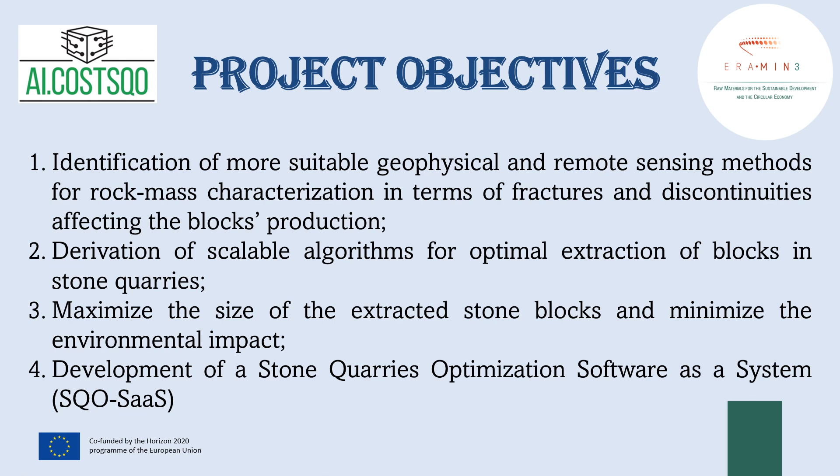Maximize the size of the extracted stone blocks and minimize the environmental impact. And development of a stone quarries optimization software as a service, SQO SaaS. The main expected outcomes by the end of the project are the following: a framework for quarry optimization and environmental sustainability based on artificial intelligence algorithms.

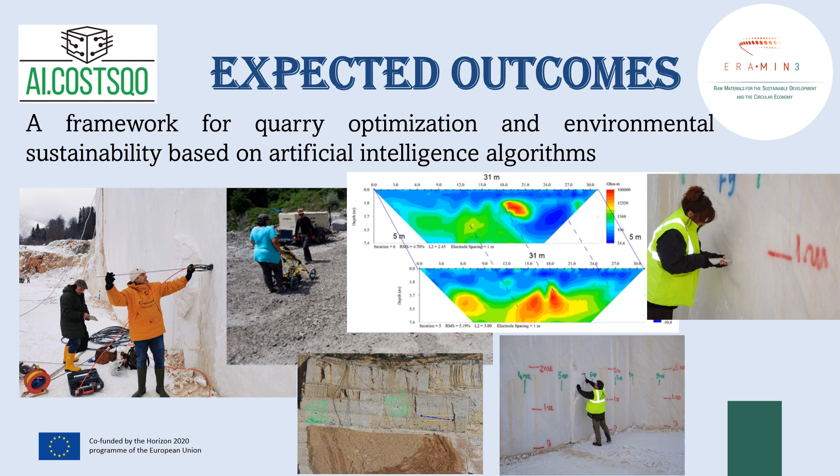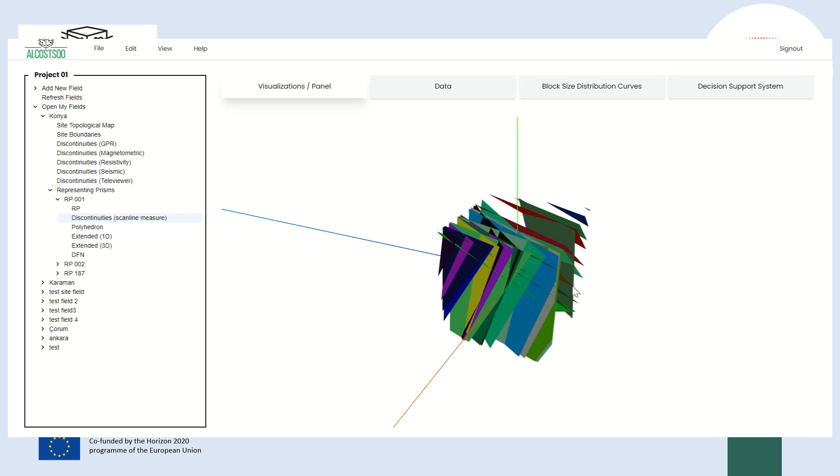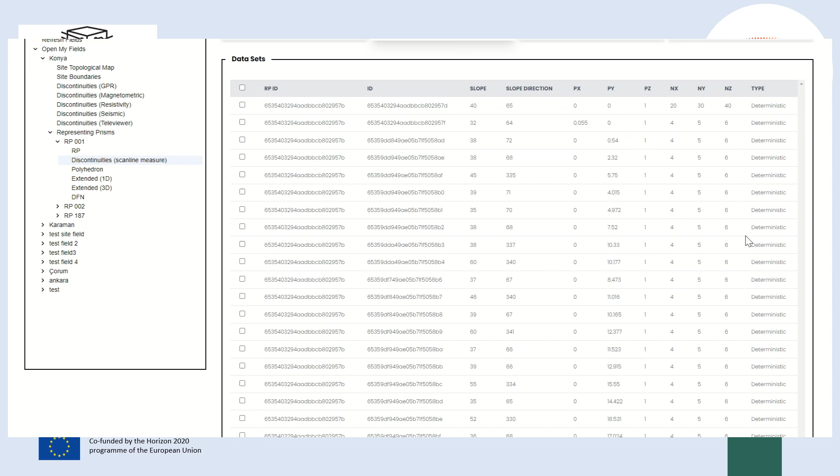And then we can see the representative prism. This is only one rectangle, and for example, discontinuities inserted from the scanline measure. This is the deterministic approach of the problem. We have envisaged to develop both deterministic and stochastic analysis of the fracture system. In this case, data is represented deterministically, and we can visualize this data.

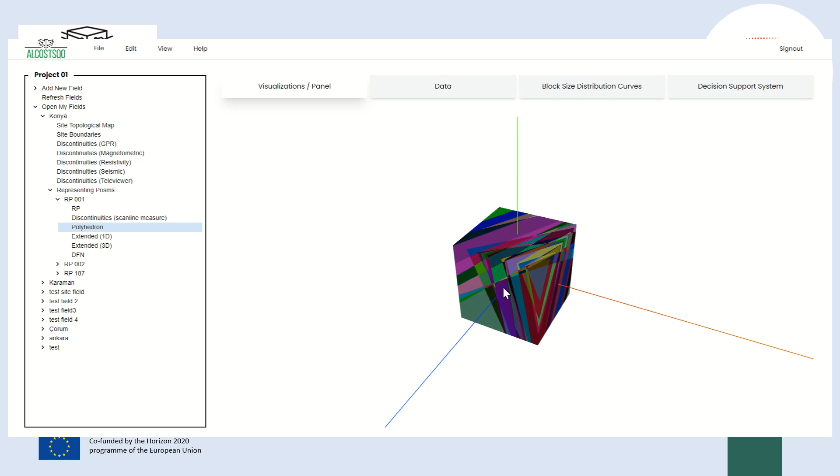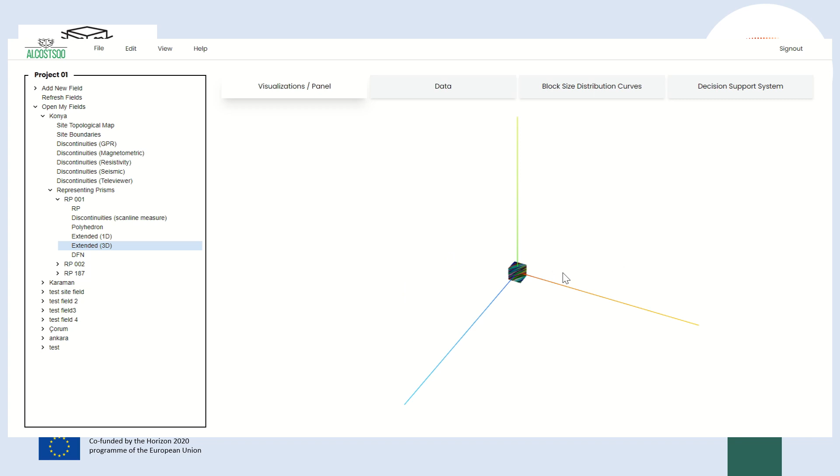And we have got from the intersection of these discontinuities various polyhedrons which established various blocks of different sizes and shapes. And this is the extended 3D version of the representative prism.

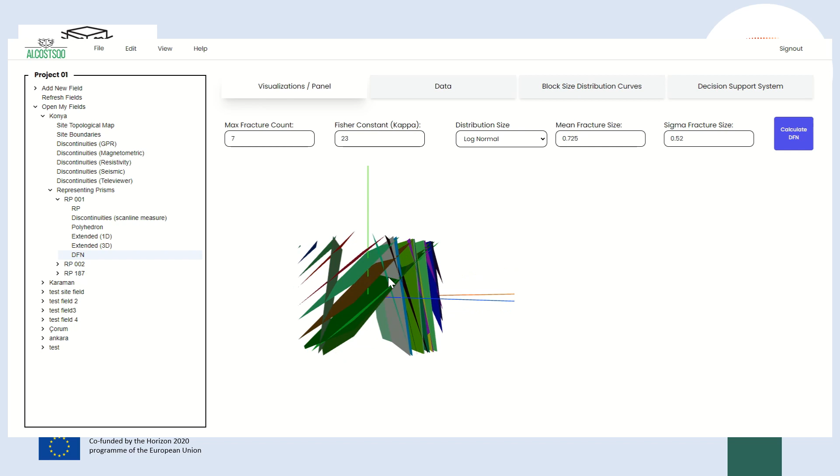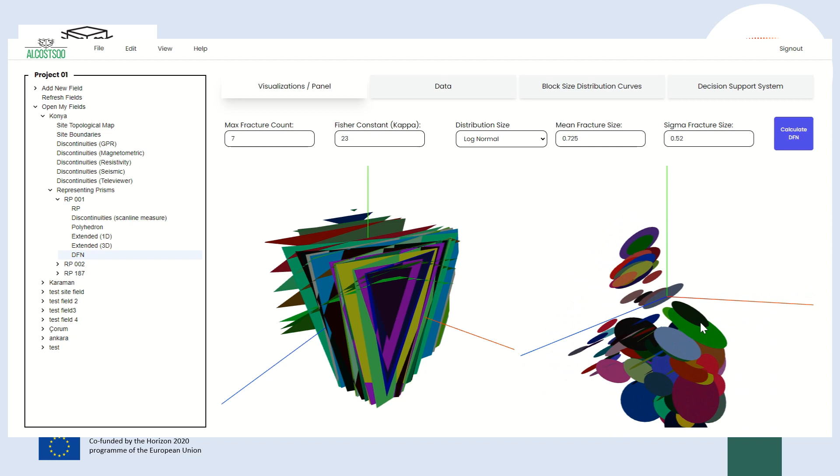And we also implemented some routines for discrete fracture network. We can see the discontinuities as deterministic, and if we calculate the discrete fracture network, where the joints, the fissures, are represented in this case by discs, circles, we can see them.

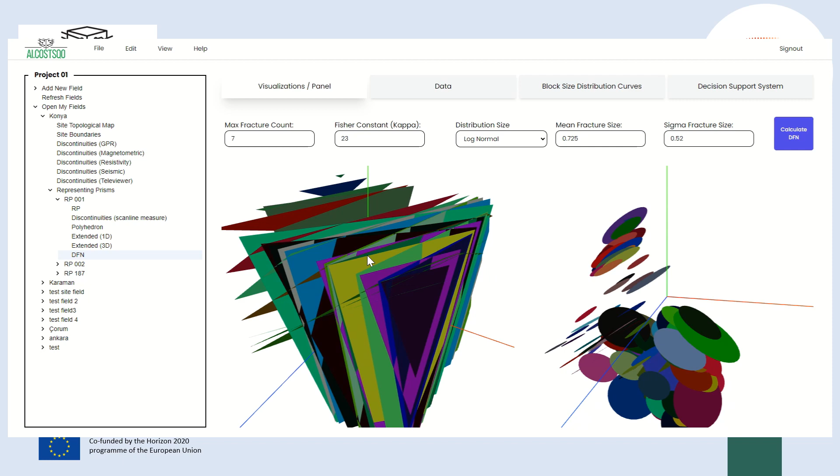So now we will have to calibrate the discontinuities obtained from in situ measurements, which is on the left side, with the discrete fracture network, which is generated through our algorithms implemented into the software. And we have various distributions for dip direction, and we also have some other sites.